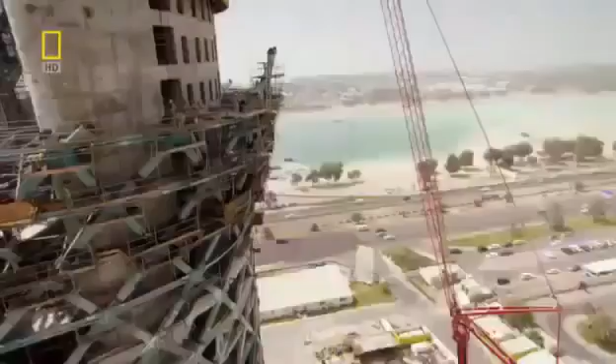To make it stand up, it'll take some extraordinary engineering that could rewrite the skyscraper rulebook. Situated on the edge of the Persian Gulf lies the Sheikhdom of Abu Dhabi. It's the largest and richest of 7 states that unified in 1971 to form the United Arab Emirates.

Abu Dhabi is undergoing one of the biggest makeovers of modern times. Its ruler, Sheikh Khalifa bin Zayed Al Nahyan, wants to join the City Super League. And he's spending over $200 billion to transform his capital into a world-class business and tourist destination.

He's already spent a reputed $3 billion creating the most expensive hotel ever built. The Emirates Palace boasts 114 gold domes and is the height of luxury, where rooms cost up to $12,000 a night. And that's not all. He's built one of the largest and most opulent mosques on Earth.

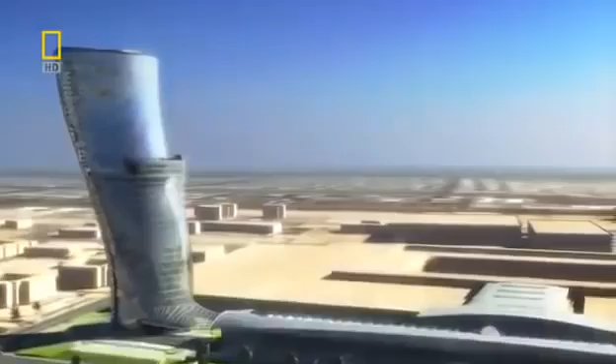The team come up with an extraordinary design. A tower that spirals out of the ground to 160 meters, inspired by a desert whirlwind and the splash of a wave rising over the sand. This gravity-defying skyscraper tilts almost 5 times more than Italy's Leaning Tower of Pisa. No single angle of this tower is the same as another. It's a structure guaranteed to amaze.

We really wanted this to happen. They could see a vision suddenly. They could see something that would stand for them. Then there was no stopping us. Sheikh Sultan wants the lower floors to become the most prestigious office address in Abu Dhabi, with the top 18 levels assigned as a 5-star hotel fit for royalty.

But for maximum impact, this landmark skyscraper also needs a prestigious location. The Sheikh decides the tower will stand next to a monument of national importance, the Grandstand. Built by his uncle and founding father of the United Arab Emirates, Sheikh Zayed, it's used to this day for national celebrations. This monument and the skyscraper will link Abu Dhabi's future with its past.

Over the past 50 years, this land has experienced extreme change like no other. The discovery of huge oil reserves in 1958 set the wheels of progress in motion. Abu Dhabi's ruler, Sheikh Zayed, had a vision: to unify the sheikhdoms and secure their financial future from Western dominance. He then set about using his black gold to create a city that rose out of the desert.

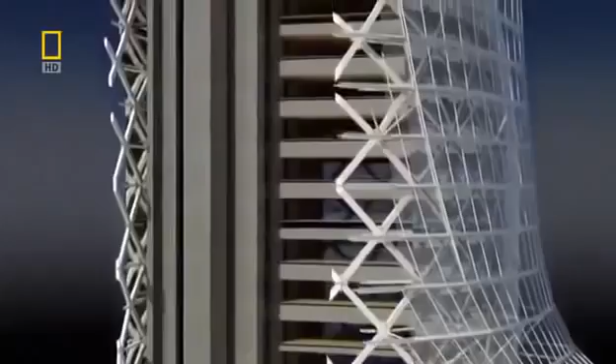To make Capital Gate's gravity-defying design a reality, it'll take some extraordinary engineering, and the challenge begins on day one. Its top floors overhang its base by 33 meters, creating huge forces that want to rip the building's foundations out of the ground.

At the construction site, project architect Tony Archibald is daunted by the task ahead. When I first joined the job, I was shown the drawings, and I kind of did a double take, and I wasn't quite sure that I got the correct understanding of the project, and it took me a few moments before I realized what we were about to undertake.

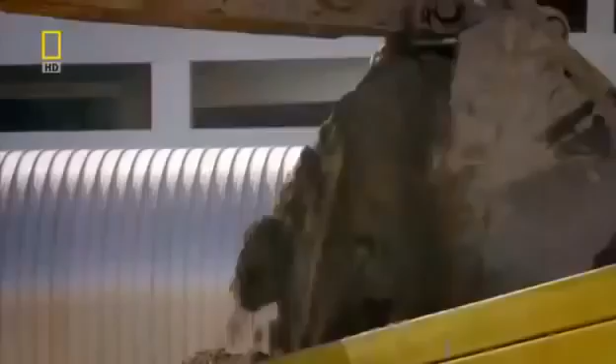Keeping Capital Gate upright is a huge engineering challenge. There isn't just one solution. To overcome the forces of gravity, it will take a whole range of pioneering techniques. But the task starts with the foundations, deep underground. On one side of the building, the weight is going down into the ground. On the other side, it's being lifted out of the ground. And that's due to the large overhang that we're having to deal with.

The solution requires almost 400 concrete piles that work in two different ways. On the leaning side, half of the piles push the overhang's forces into the ground. On the opposite side, the remaining piles anchor deeper into the bedrock. They resist the stretching forces, trying to wrench the building out of the ground.

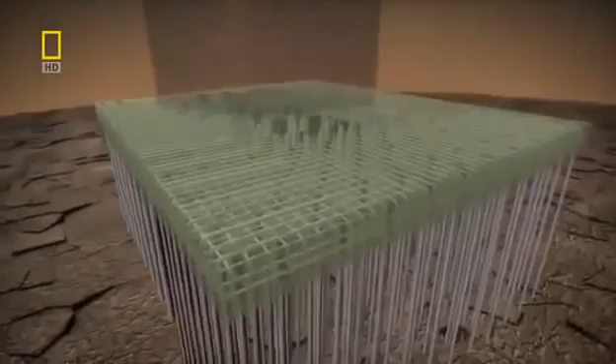Finally, to evenly distribute Capital Gate's forces into the piles, a deep concrete slab reinforced with steel is laid on top. What the foundations taught us is that every single aspect of this building has to be custom engineered.

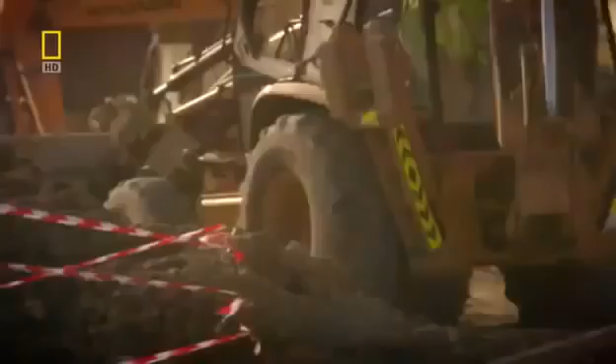Excavators dig out a colossal 6,000 cubic meters of sand. And over 8 weeks, hundreds of piles are driven into the ground. We had an awful lot of piles to put in very close proximity. It was a real difficult challenge. There can be no let-up on this schedule. Sheikh Sultan wants Capital Gate complete by an impossibly tight deadline.

In less than 2 years' time, Abu Dhabi will host the World Future Energy Summit. Over 3,000 delegates from 50 countries and the world's press will convene at the neighboring Abu Dhabi National Exhibition Center. It's the perfect opportunity to showcase Capital Gate and prove Abu Dhabi is at the forefront of innovation.

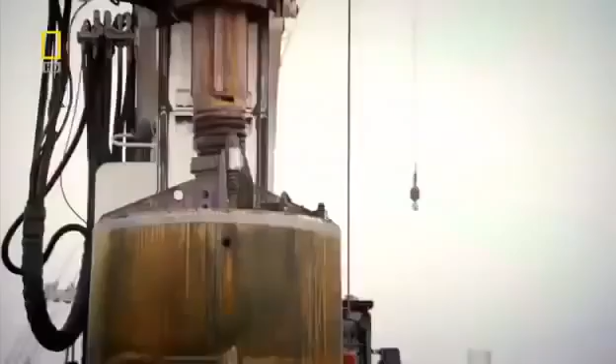But this gives the team just 24 months to design and build a unique skyscraper. With the foundations finished, building above ground can begin. But because of the dramatic lean, it will have to be constructed in a very different way to a conventional skyscraper. We realized once we'd done the foundations that this was going to be the first of many difficult problems.

A normal skyscraper requires a solid core to hold it upright. But Capital Gate's curves will just crack and topple a standard core. Engineers must discard conventional thinking and devise a way to defy gravity. Inspired by the nearby desert landscape and its wind-shaped dunes, architects have designed a curved leaning tower. But it'll take some audacious engineering to stop Capital Gate from falling over.

Normal skyscrapers are built around a slim vertical core, which helps to channel the building's weight into the ground. There's so much overhang on this building that a conventional core, there was no way it was going to work. You just can't build a straight core. It's just not strong enough. Capital Gate's design would cause a conventional core to bend dangerously. The pull of the massive overhang wants to stretch the core on one side, causing the concrete to tear apart.

Structural engineer Mona Vassi knows it's a serious problem that must be solved. When I saw this one, I thought it's impossible, it's not going to work. It's just some sketch, somebody left it somewhere. But I always think that for the architects, it's easier for them to just draw something, but it's not easy for us to fulfill or satisfy their needs.

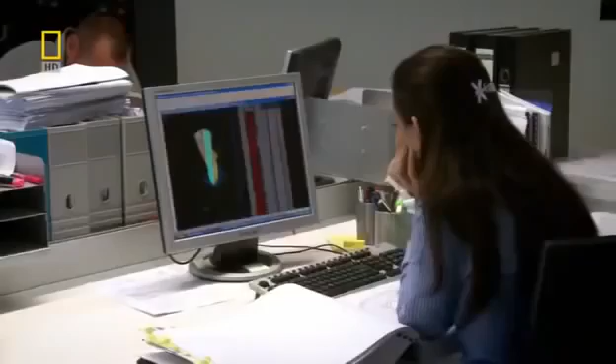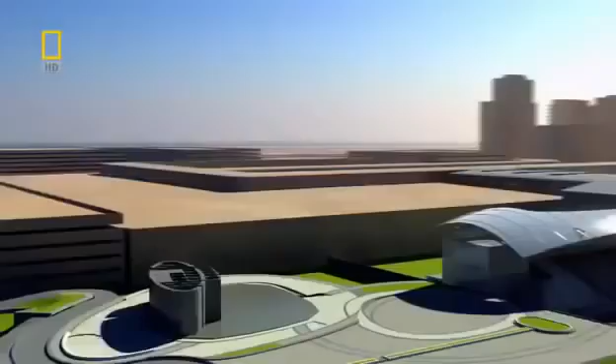The engineers developed two groundbreaking solutions. The first part of their plan is to build the core with a curve, bending in the opposite direction to the building's lean. As the structure grows, its weight pulls the core straight. In total, it shifts 350 millimeters, and the effect is significant. The concrete that would have been stretched by the overhang's pull will now be compressed and strengthened.

You build it bent, and then as you add the slabs to the upper levels, it pulls it back into vertical. So basically that whole vertical core is in compression, and that gives it immense strength.

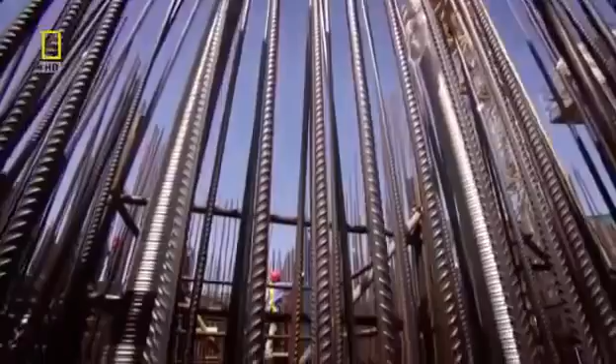The core grows 4 meters a week, and construction manager Les Fairchild is in charge of building it. This is probably the most complex core that I've come across. It's built at an angle, and effectively the core holds the whole building up. The core is built using a technique called jump forming.

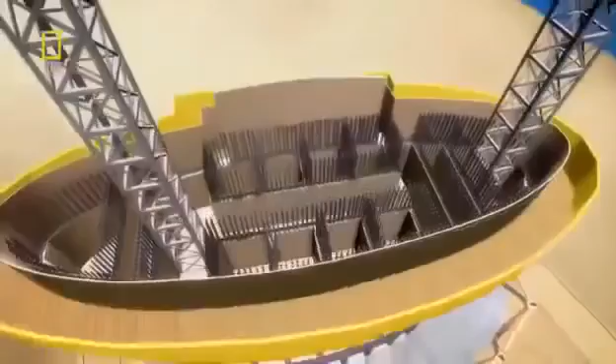First, a dense mesh of steel reinforcement is assembled. A mold then closes around the steel to form the shape of the core. The steel mesh is then filled with concrete. Then the mold or form can climb up the core wall for the process to start all over again. Jump form is a hydraulic platform. Once we've cast each 4-metre level, we simply attach it to some runners and we jump it hydraulically up to the next level.

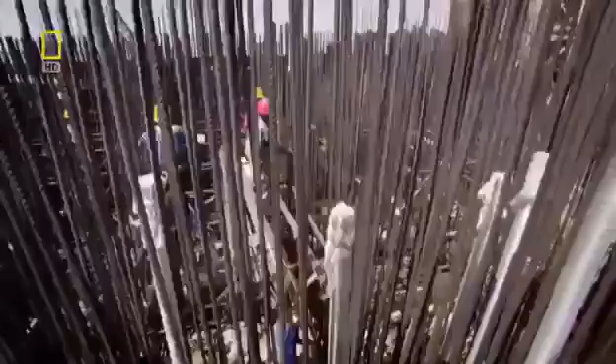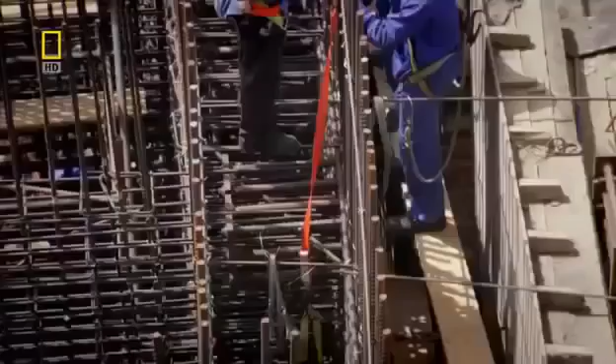The core will be strengthened as it straightens. But for the core to carry extreme loads, the concrete must be reinforced using steel rods called rebar. The rebar is installed during the daytime, but temperatures of up to 50 degrees Celsius and concrete don't mix. It dries too fast and could crack. To set at the right speed, the concrete has to be poured during the cool of the night.

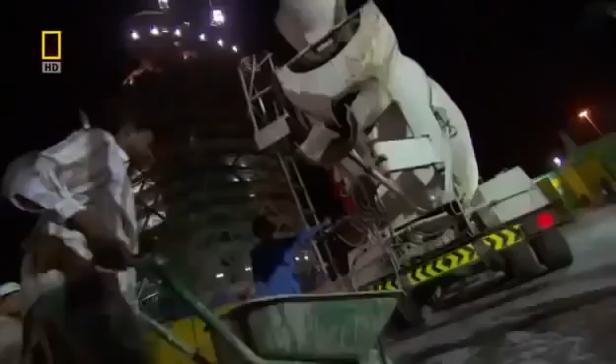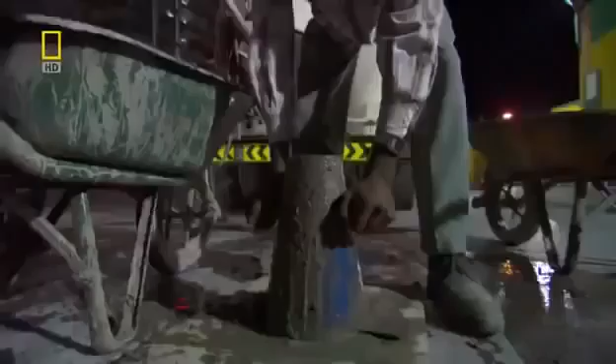As the core grows higher, the liquid concrete has to be pumped over longer and longer distances. So the consistency of every batch is first checked in a slump test to ensure it won't block the pipes. When you first see it coming out the wagon, you can usually tell whether it's a tight mix or a loose mix, and that's what we're testing for really in the slump test. We simply make a cone, lift the cone off, and how much it reduces in height tells you exactly what the slump is. The one we just witnessed is 215 millimetres, which is within the specification, so that's good to go.

Whilst the truck drives to the pump, Fairchild needs to get onto the core. He can take the stairs, but 90 meters up is a long climb. He knows a much faster way. Crane lift.

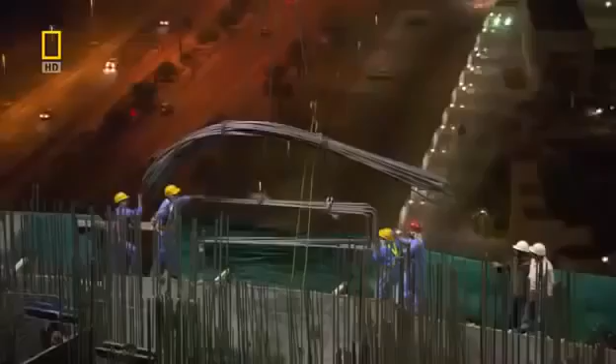It's going fairly well. We've had a nice continuous supply of concrete, and we're now pumping it up to the upper levels of the building. And the lads are just steadily working away. They actually work from one side to the other in metre deep layers, so they're doing everything right. It's always exciting when we pour concrete. It means it's another achievement really. We're going up another level.

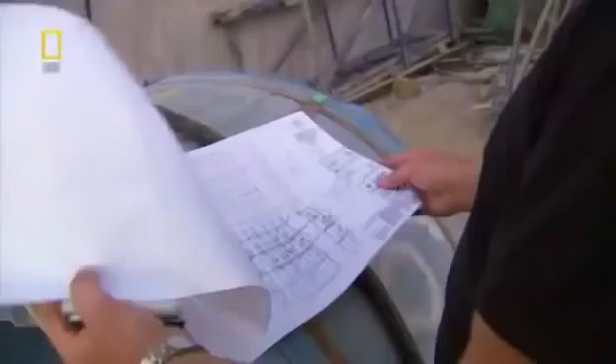But building the core out of alignment and packing it with rebar still isn't enough to stop gravity toppling Capital Gate. What we came up with is a post-tensioning solution where we introduced much more reinforcement into the core wall and then used the tensioning process. Basically that was done by introducing high tensile strands to the centre of the walls.

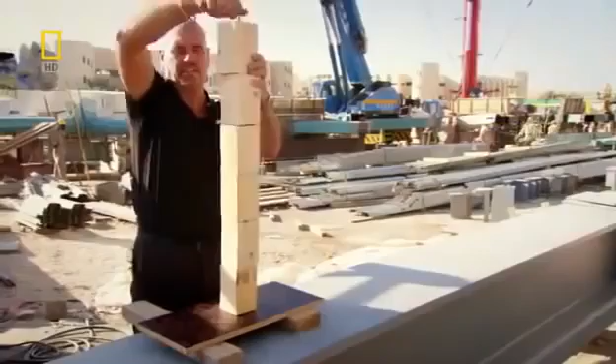When we reach the designated height, we simply apply tension. We're actually stretching the tendons that fall through the wall, and we're pulling them tight, and that's done by a tensioning machine. So effectively, when the tension is complete and the load was applied, the core would stay intact, and the additional reinforcement would prevent it from falling over.

To post-tension the core, 146 steel tendons are threaded vertically through the concrete. Each tendon is 20 meters long and runs through 5 floors of the building, overlapping each other for maximum strength. When the tendons are stretched, the stress counteracts the pulling force created by the massive overhang, stopping the concrete from tearing apart.

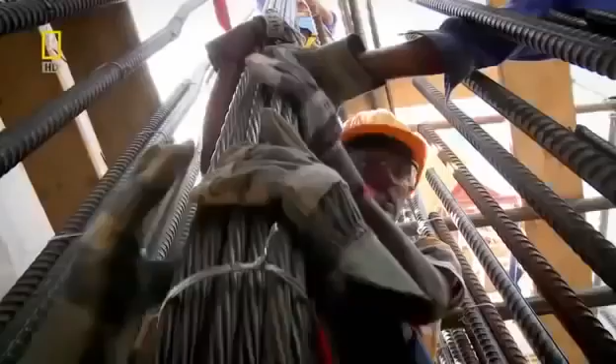On site, the team are post-tensioning the core, but no one has ever attempted this vertically in a skyscraper. The long tendon is lifted to the top of the core. The team used the steel tendon's weight to force it through a duct already cast through the core. Once the tendon is in position, the team lock off both ends, ready to tension its individual strands.

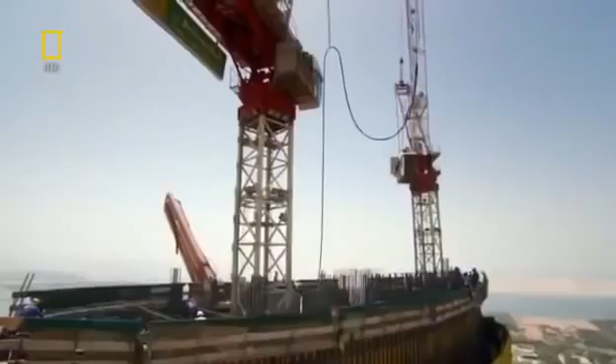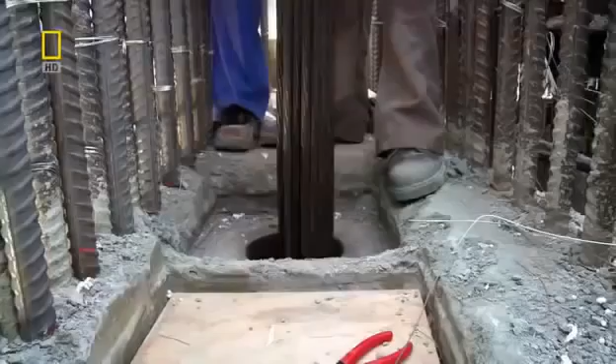A pneumatic jack clamps around one strand at a time and stretches it. It's equivalent to about 5 family cars pulling on one end of the rope. With the steel tendon now stretched to the right stress level, concrete pouring can continue upwards. The quantity of cable that's being used is approximately 120 tons and 120,000 metres in length. It's about 44 times the Golden Gate Bridge. This process is repeated over and over and means the core should withstand the huge loads generated by Capital Gate's extreme overhang.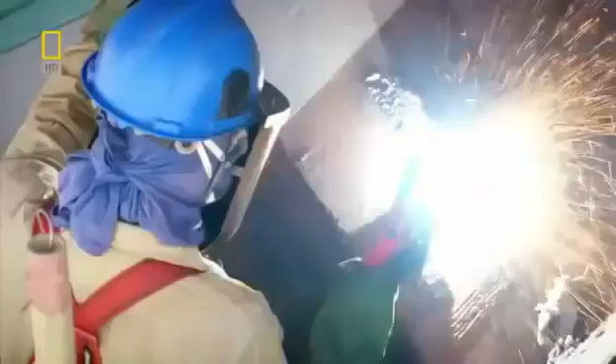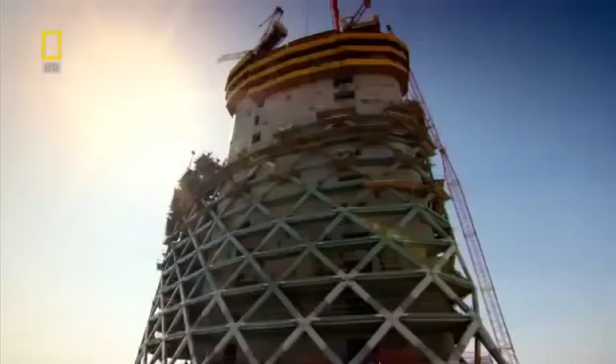But now, an even greater challenge must be tackled. The building's twisting, leaning design must somehow be turned from theory into reality. And once again, it'll mean bending the rules of architecture. To create Abu Dhabi's architectural icon, Capital Gate needs an exterior curved leaning frame. But once again, the building's extreme tilt creates a problem.

The shape of the building with this very pronounced overhang meant that traditional skyscraper building solutions just weren't going to work. There's no way. The building design requires it to be thin to maximize floor space and allow for huge panoramic windows. Irfan Ahmed is one of the engineers who has to find a solution. For structural engineers, it's always challenging to accept the architectural requirement, you know. They always want thinner and thinner and thinner.

Surprisingly, the humble egg could help with this engineering dilemma. It is essentially a skin of structure around the outside of the building, not unlike an egg. An egg can withstand huge loads because it evenly distributes forces down through its shell, which means the shell can be thin, creating more space inside. So it's very, very thin, it's very, very strong. If I try to crush this egg, you can see that it's actually amazingly resilient. So let's see how resilient.

Here I have 170 eggs laid out, and we're going to put load on top of these in the form of breeze blocks. Moment of truth. So far, so good. Each one of these blocks weighs 15 kilos. So we've nearly got half the weight of a car on here now, on our 170 eggs. Let's see how far we can push this. That's 30 blocks, and I think it's about to go. It's going big time now. This is it. This is the end.

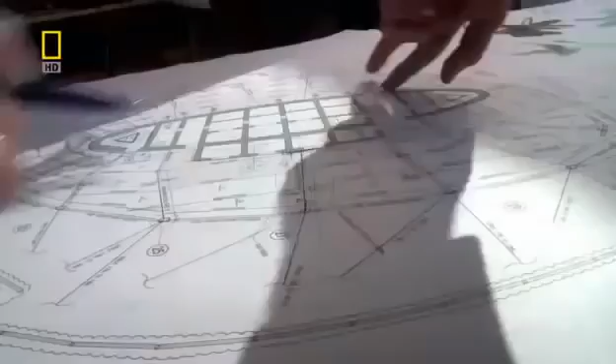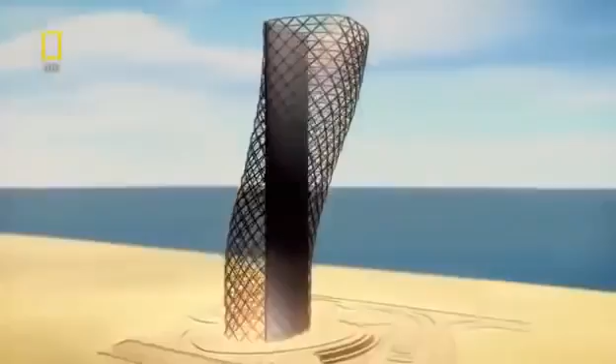No! These eggs eventually crack under the weight, but they withstood over 450 kilos, half the weight of a family car. Yeah, we used to have it all around the floor. Capital Gate can't channel forces with eggshell, but it can use the principle of how it works, using a diagrid. A diagrid is a giant mesh of steel that wraps around the core. Steel beams connect to a node or joint to form a cruciform section.

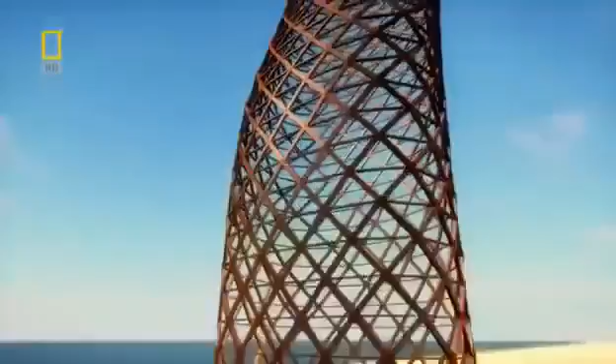720 uniquely shaped sections link together to form the thin but immensely strong diagrid. Working together, these cruciforms equally distribute the forces down the outside of the building. The way it does that is by making a uniform net, so that the forces are very evenly distributed, and that means that we can get away with slenderer sections. On site, a team of 240 steel fabricators assemble the diagrid.

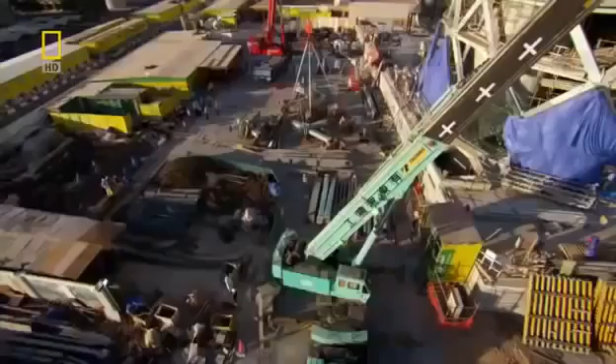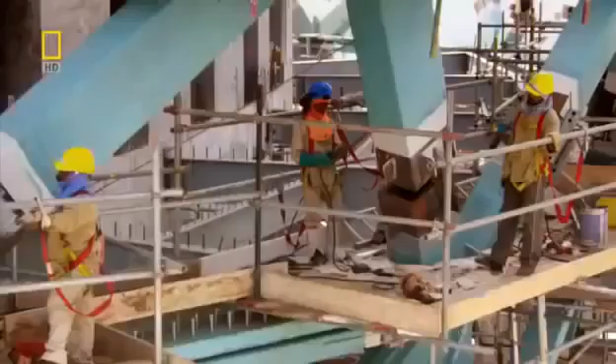They've built the easier straight part of Capital Gate's base, but now the structure is starting to lean, making installation even more challenging. Each cruciform, weighing up to 16 tons, has a unique geometry and must be crane lifted at a precise angle. If the diagrid is not assembled with millimeter accuracy, the mesh will not channel the loads and the structure could be weakened.

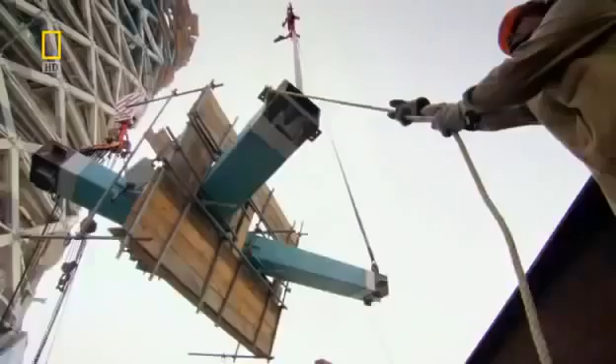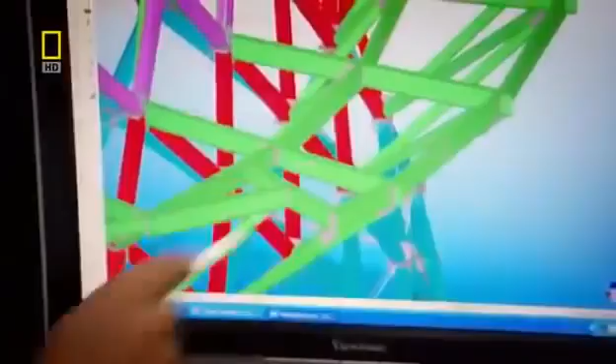The engineers must communicate closely with the expert steel fabricators. They design and manufacture the diagrid 150 kilometers away in the neighboring emirate, Sharjah. Here, cutting-edge construction is the norm. They've built one of Malaysia's Petronas Towers and Dubai's iconic skyscrapers, the Burj Al Arab and the Burj Khalifa. But Capital Gate's revolutionary design pushes even these experts to the limit.

On the planning floor, project engineer P. Bhaskaran and his team need bespoke 3D software to tackle the building's highly complex diagrid. The 3D modeling is done, and any unforeseen criticalities will be very clearly identified in the 3D model. Each one of the 720 cruciforms is precision engineered, not only to channel huge forces, but to connect with millimeter accuracy to the neighboring cruciforms and the glass facade.

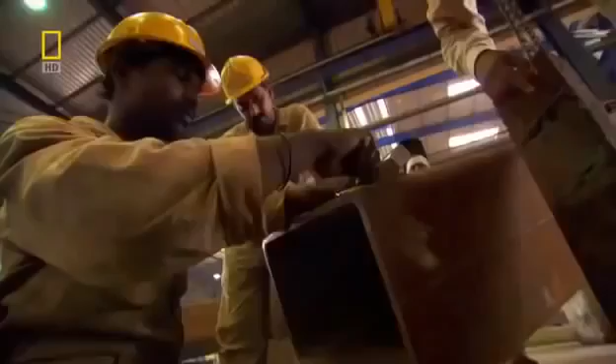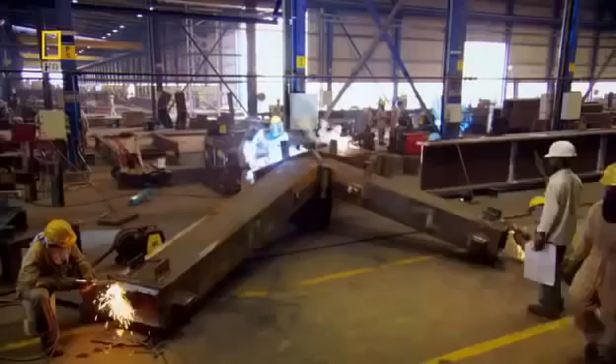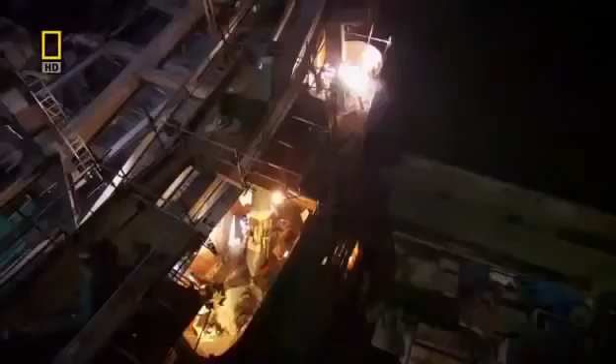But to measure their exact angles, the team used some old-school technology: chalk. It might look unsophisticated, but it's highly accurate, ensuring all the elements will join together. To keep up with construction, the factory must produce 18 cruciforms every week. Constructing such a huge building, a critical building within the short span, without working 24 hours, it is absolutely not going to happen. As the skyscraper reaches new heights, the long hours start to pay off.

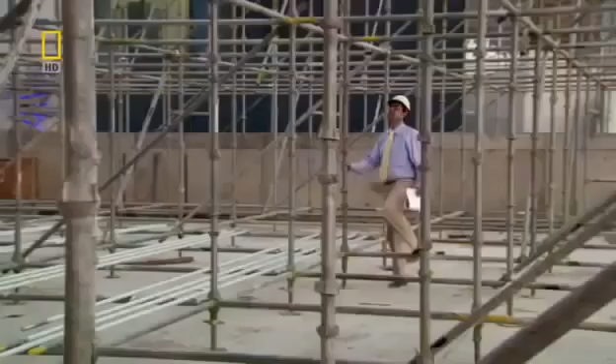This design pushes the diagrid technology to its absolute limit, and in fact far beyond what's ever been achieved so far. Even in your dreams, you're thinking about this project. So once you see the structure coming up, you forget all the long hours you spend and all the sleepless nights. A colossus is fast emerging from the Abu Dhabi sands. Now, this leaning tower must be clad with a glass facade. And as always with this gravity-defying structure, it's going to require some revolutionary engineering.

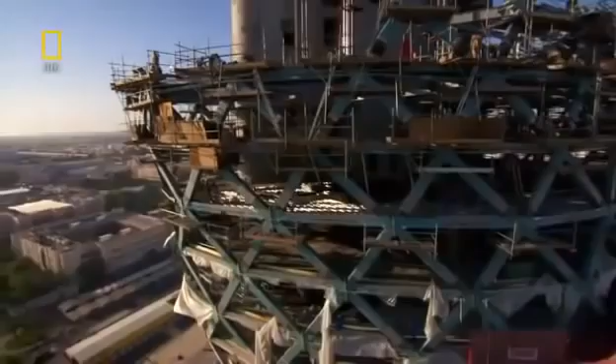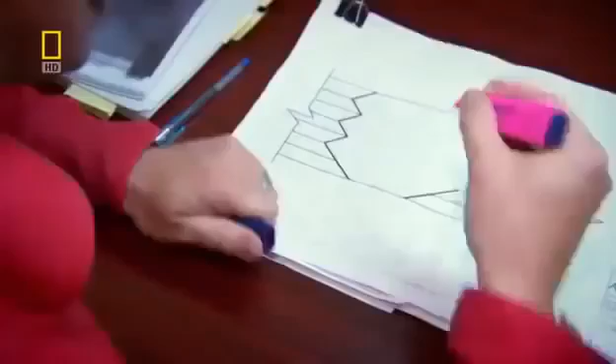Glazing Capital Gate's leaning curved frame is a major problem. Covering its unusual contours with curved glass will blow the budget. So the skyscraper's curves must somehow be clad using cost-effective flat glass panes. Fortunately, ancient Greek geometry can help.

Because you've got a complex shape, it's an organic shape, it's a curved shape, the only way to model that with straight lines is to use triangles. Triangular panes can pivot in 3 directions, and when joined together can cover complex geometric surfaces. But because every angle of the building is unique, it'll take 26,000 triangular panes to form the facade.

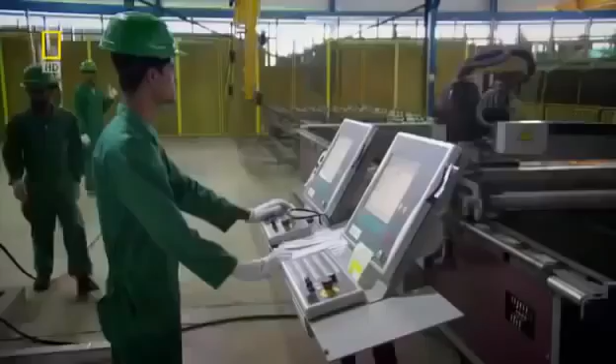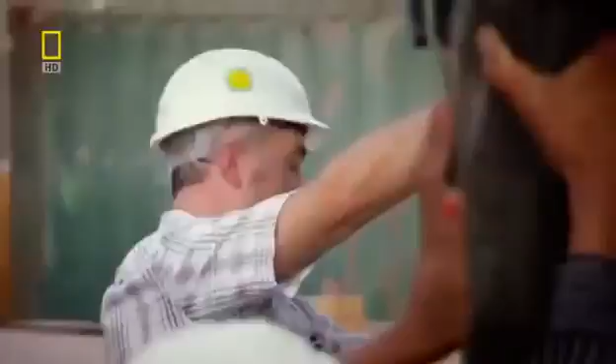With so many glass triangles to cut, the local glass factory springs into action. Each pane is scored by an automated diamond cutter to an exact pattern. The triangles are then sent along the production line. The team is under constant pressure to deliver enough glass to the site. Hey, this side, you guys, hold it. After several weeks, 8 diamonds are in place and another 100 standing by.

But the glass design is so unconventional, it still has to pass a number of tests to prove it's up to the job. Because we'd already started the glass installation, the results of this test were absolutely key. Each panel is stacked one upon the other. So if we'd had any kind of problem, we would have had to unstack them, which would have had disastrous consequences for the program.

This is no ordinary glass skin after all. Capital Gate's core straightens as it grows. The skyscraper will not stop moving until after completion. Normal glass facades can accommodate minute movements caused by wind and temperature changes. But to stop the glass shattering and keep the building watertight, the panels must be designed to shift by up to 20 millimeters. The scale of that kind of movement is almost unheard of in glazing systems. It's a vast amount of movement.

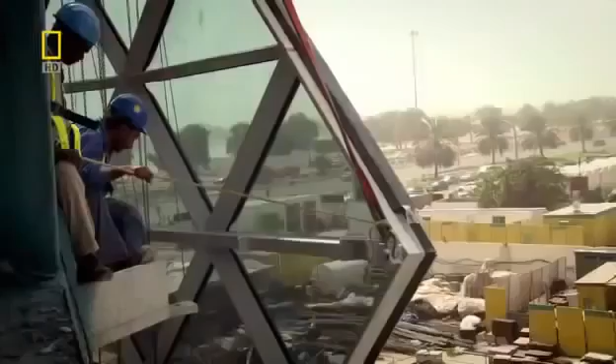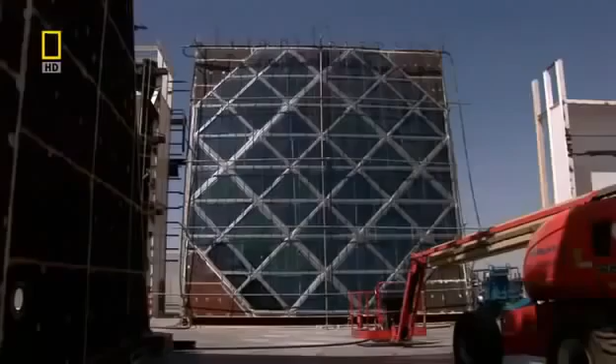With glass installation ongoing, construction manager Craig Rooney needs to know the panels will perform. We don't want to get to the top. We've done it, we've installed it, we think we've done a great job, and then it all leaks. The panels must be tested to the limit at a Dubai laboratory. A plane engine and many litres of water simulate worst-case scenario weather. Now the moment of truth. Any leaks could be a disaster.

And it's bad news. The first time we got a full water test, we had a leak. The fact that we had a leak was devastating to the whole team and very alarming. The diamonds connect to each other by a bespoke two-layer seal. The flexible spongy seal allows the diamonds to move and keeps water out. But if any water does seep through the outer seal, drainage tubes fitted at intervals let the water flow away.

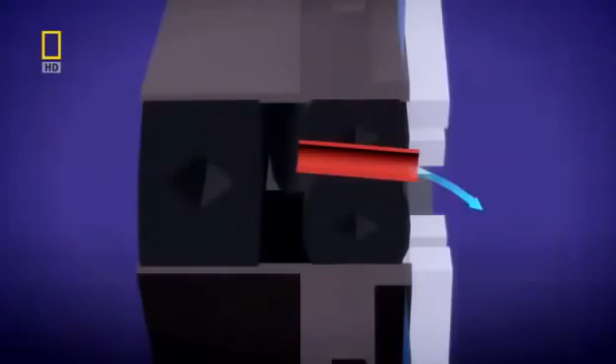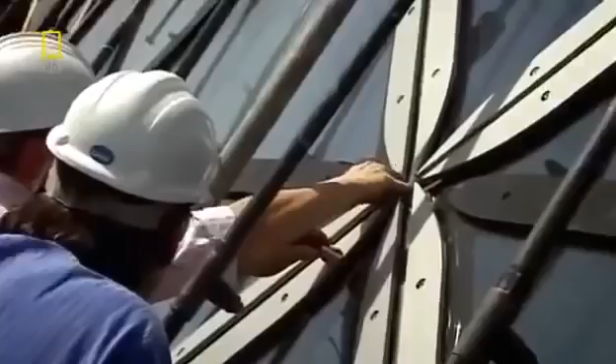The panel has failed the test. Water has flooded inside and penetrated the inner seal. If it was a fundamental failure, we're back to the drawing board, so the cost and the budget and the program all go completely out the window. The panel is examined. Answers are needed fast. Fortunately, it's not a design failure. They discover a drainage tube is only blocked with sand. The problem resolved, installation can step up a gear.

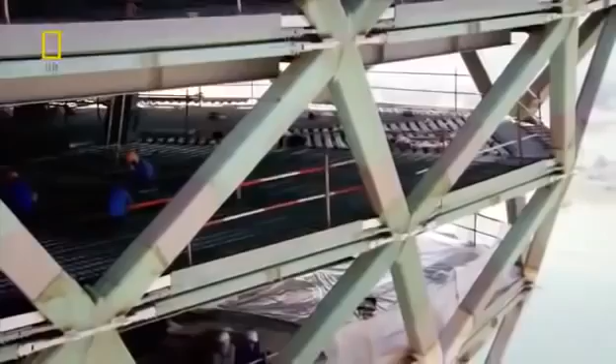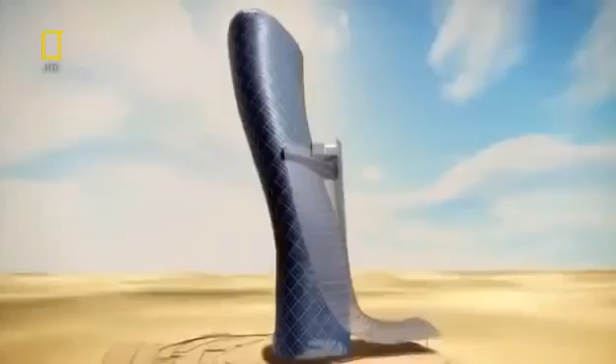But as always with this audacious building, one problem is solved and another is just around the corner. To give Capital Gate's five-star hotel lobby the wow factor, architects again plan to push the design to the extreme. Now they want to build an infinity pool and a restaurant, hanging 100 meters above the ground.

18 months into the build, Capital Gate's design is about to give a new slant on high-rise living. The architects want a pool deck and restaurant suspended in the sky, but it's an engineering headache. There's so many requirements that architects have that really put us in so much trouble as engineers, but you want to make sure you have a safe structure.

The design calls for a two-story extension, hanging without any visible support. But the pool's water alone will weigh 150 tons. The structure's huge mass means it needs reinforcement. We needed some supports from below, otherwise there was no other solution. I don't think you can have a cantilever that huge on this building, no way.

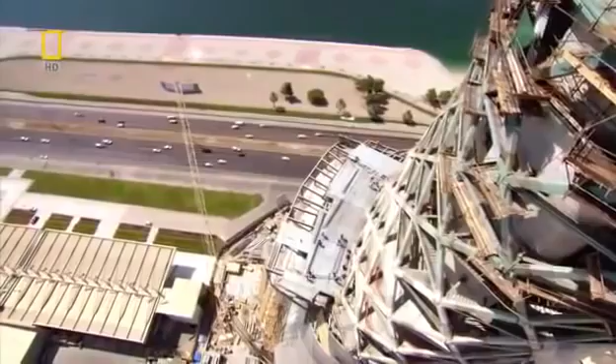The design will only work if it's underpinned with 22 steel struts. They will carry the loads back into the building. But the struts must also look delicate to meet the architect's aesthetic demands. On the construction site, 90 meters up, the pool and restaurant is taking shape. All of its structural elements are in position, except one. The team are raising its last 6-ton floor beam.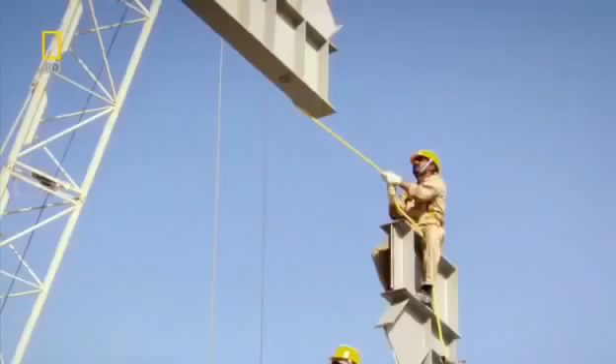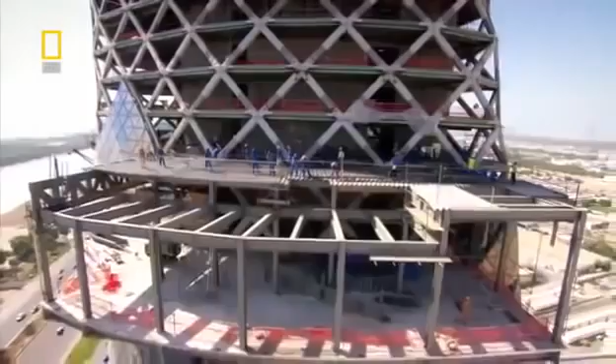It's taken many crane lifts, but one of the highest suspended swimming pools in the world has made the leap from blueprint to building. See all those lines that you just drew? They're actually drawing the same thing for you, but with a crane. But the feeling is indescribable.

And the structure's muscular struts and connections are also elegant. The idea behind these junctions is that they behave like the insects that can walk on water. They're sufficiently light that the surface tension keeps them above the water. So these little brackets dissipate the forces from all that weight.

Capital Gate is fast becoming an Abu Dhabi landmark. But the taller it gets, the more the weight of its upper floors is a problem. The skyscraper needs to go on a diet. And this time, the architects come up with a clever solution. The building has lots of visual surprises.

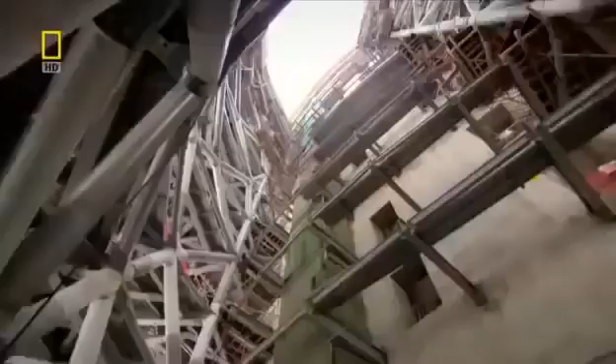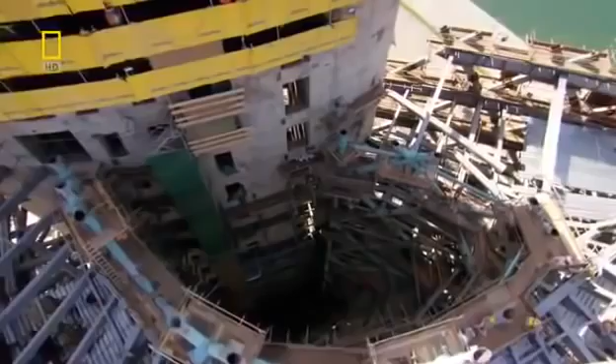And one of the most important ones of those is the internal atrium. It's a kind of a light well that brings light from the sky deep inside the building, and it extends over half the height of the building. So it starts out very, very small at the bottom and opens out in a big funnel. This cavernous hole is good news for reducing weight and minimizes forces.

But the atrium is a double-edged sword. The floors are critical in transferring loads from the diagrid to the core. A giant hole through 18 floors means these loads must find another pathway. It's a very, very big hole in every single floor plate. So our engineers really had their work cut out.

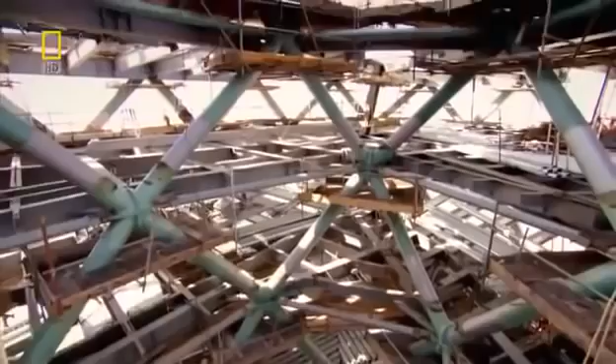You don't want to have an opening in your floor. You want to have more concrete, reinforced concrete, to transfer these forces. The forces need to flow away. And the solution is pioneering. An internal web of steel mirroring the external diagrid. This is the first time we've ever heard of this being done.

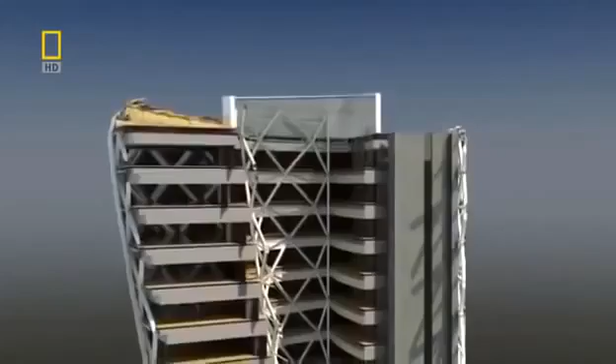The internal diagrid is actually a fundamental part of the structure. This funnel-shaped internal skeleton carries the forces of an 18-story building down to its tapered base and into the core. But the loads are extremely high for such a small area. To stop the atrium punching through the core wall, the concrete needs protection.

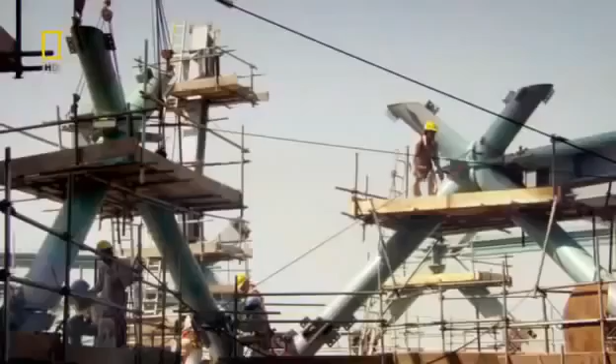The answer? 6 giant plates of steel that brace the connection to the core wall. The connections are really a wonderful, wonderful piece of engineering. They're 8 meters high. They span 2 floors, and they connect back into the core. The atrium's near completion brings Abu Dhabi one step closer to achieving an iconic landmark.

But as the sun goes down, this isn't the only celebration underway. On site, the Indian steel team are holding an annual blessing to the Hindu god Lord Vishwakarma, the protector of architects and engineers. Their livelihoods depend on staying safe, and although they use safety equipment and are highly skilled, working with huge sections of steel at height is never risk-free.

We pay our respect to God and get the blessings from the God. We do that for the safety of all our workers and for the proper completion of the job. Every trade of workers we take, the basic tools they are using on site, that has to be just kept in front of God, and the workers, they feel themselves that they are in safe hands. The tools are now blessed, and the steel team's morale is high.

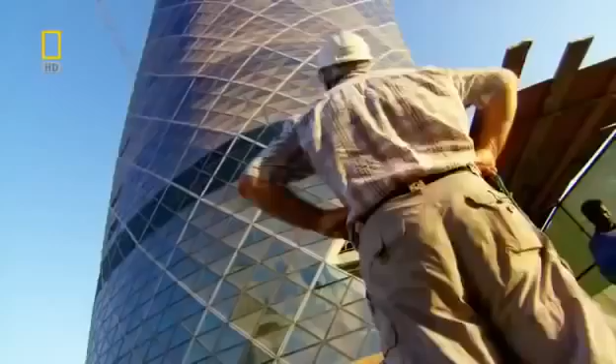But the glass installers, lifting diamonds to over a height of 100 meters, are getting the wrong kind of lift from Abu Dhabi's highly unpredictable wind. If the wind is too strong, then you can feel this in your hands when you hold these diamonds by rope. I always get nervous if I see the panel starting turning. And this makes me always a little bit afraid when I see diamonds going up and starting moving.

Meyer has to act quickly, or this 4-ton diamond could smash into the building. Not for the first time, lifting glass is delayed by changeable weather. At this rate, Meyer won't install the remaining 107 panels in time. But Abu Dhabi's wind isn't the only problem the Capital Gate team face. A last-minute design request comes in from the Sheikh's office that could have serious implications.

With just 6 months to go to completion, the Capital Gate team should be on the home straight. But those plans may have to be put on hold. I had a telephone call saying that we had to put a helipad on the roof, which I didn't think was a joke, but I was astounded that we got this at such a late point in the project.

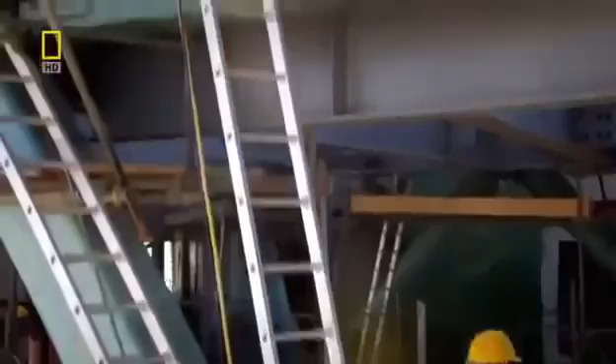Integrating what will be Abu Dhabi's highest helipad atop one of the world's most daring skyscrapers at first seems a simple request. But it actually poses 2 serious problems. It'll create new forces that must be absorbed by the already strained core, and unpredictable wind flows that can cause potentially lethal flying conditions. You get a thing called wind shear, tipping the whole helicopter onto its side, and this is a very real and very dangerous risk.

These rapid wind changes, known as wind shear, can affect the lift on helicopter blades. Aircraft can be blown off course, or literally fall out of the sky. There is no way that we could have any margin of error on the safety. The only way we could predict what the wind shear would be like on the top of the building was to model it in a wind tunnel.

In London, England, a scale model of Capital Gate is put through its paces in a high-tech wind tunnel. Just as the team fear, within seconds, wind shear conditions appear. Air currents are flowing over the top of the building, but then separate from the surface, spiraling inward to form a realm of turbulence. Wind engineer Leighton Aurelius knows the consequences could be serious. If the pilots lose control in this random ball of energy here, they may in fact end up crashing onto the helideck, or even worse, onto the tower itself. I'm sure that can occur.

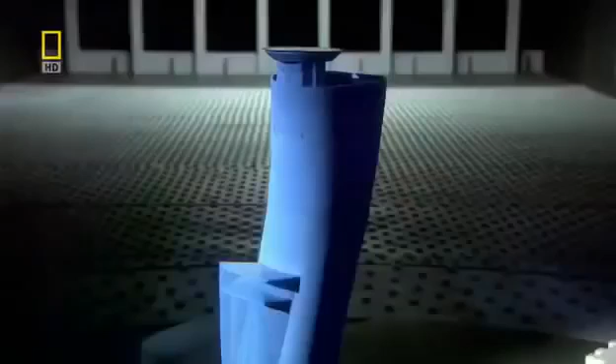To make the helipad safe, Aurelius and his team have to go against conventional thinking. We didn't think that lowering the helipad was actually going to be the optimum design, but we see reduced loading on the helipad as well as safer conditions for the pilots to land in. Lowering the helideck to just 2 meters above the roof dramatically decreases the wind shear threat, and means Capital Gate's core will withstand the additional loads.

We're relieved, frankly. The tests have actually confirmed now that we can have it in our original design position, which is very low, which will mean that the profile on the skyline is exactly where we want it. But it'll take another 5 months to just draw up the helipad's blueprints, and a crane must be left behind to build it.

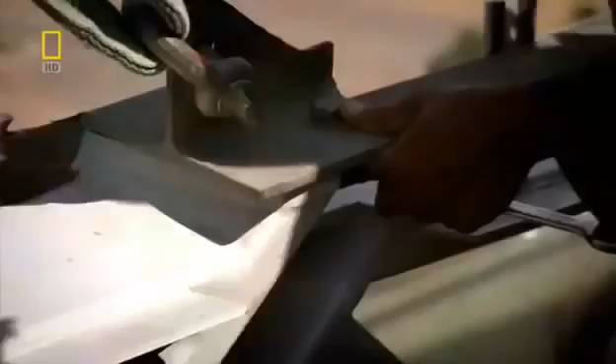Now, with only weeks to go until zero hour, the team are installing one of the last glass panels. It's a moment that once seemed a long way off. In my office I have a plan of all the diamonds we have to install, and in the beginning it looked like I'm in jail and I'm marking the wall with marks for each day. And so at first I felt I will never finish this project. Just 10 months since the first diamond was fitted, the facade now shimmers in the sun.

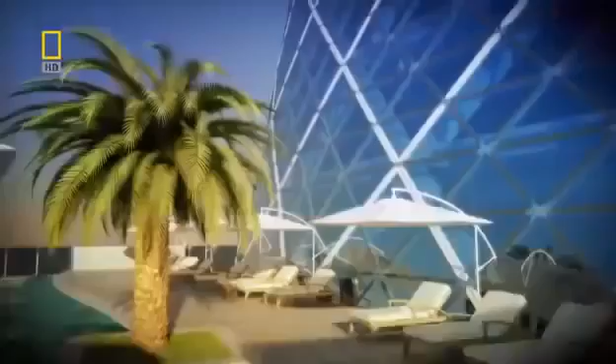Capital Gate's internal fit-out will take another year. Only then will its 5-star hotel and Abu Dhabi's most unusual office address be open for business. But against the odds, the team have created one of the most extraordinary megastructures on the planet. Capital Gate twists and spirals out of the ground, soaring to a full 162 meters. It's taken nearly 6 million man-hours to construct, and its overhang is spectacular.

You see the building and you stand underneath the overhang. It's extremely impressive. It's a fantastic feat of engineering. I feel as though I've been here an eternity, but it's probably been the quickest 2 years of my life. It's been an amazing journey and we've learned so much. And actually I think we've demonstrated that some things that looked impossible or even ridiculous were actually possible.

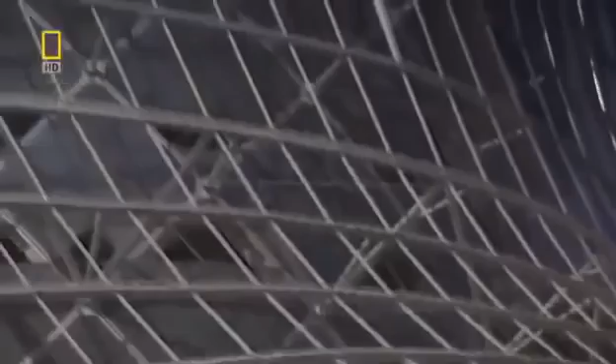And Abu Dhabi's past will soon be physically linked to its future by a wave of steel that'll rise over the grandstand and splash up the skyscraper's mirrored glass. Abu Dhabi is a fascinating part of the world to be at the moment. It says to people we can step outside of the box. We don't have to follow the rules.

With the 2010 World Future Energy Summit just weeks away, Sheikh Sultan can be sure Capital Gate will show the world what Abu Dhabi is capable of. This building is really iconic. It catches the spirit of Abu Dhabi and will be part of the postcard image of Abu Dhabi. The team have achieved what some thought was impossible. A leaning tower that claims the world record for the most inclined skyscraper on Earth.